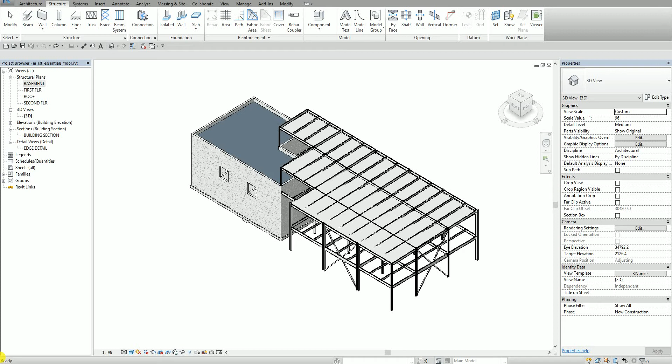In this lesson, I'm going to continue my discussion about Revit Structure 2017. I'll teach you how to add and modify floor elements, add the floor, show you how to add the shaft opening, and modify the slope of the existing roof deck. As you can see on this level, there's no floor here, and I'll show you how to modify your existing roof deck by changing its slope.

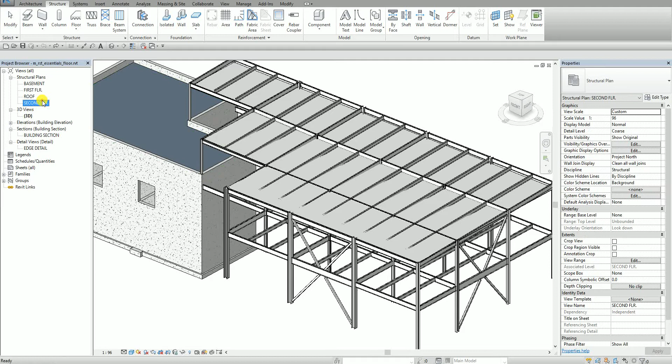Okay, let's get started. First, I'm going to open my second floor, where I'm going to place my structural floor. From the structure tab, I'm going to select the floor.

I'll just use the default floor here, and then I'm going to use the line tool to create the boundary of my floor.

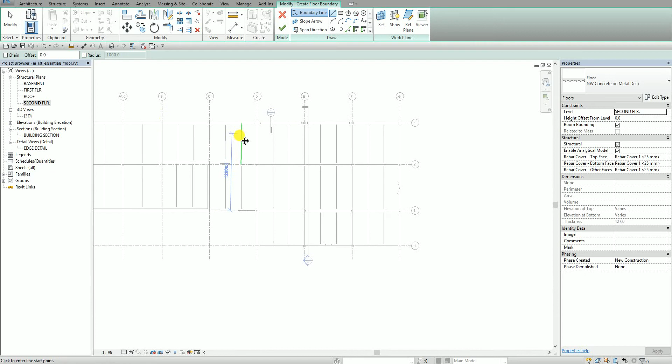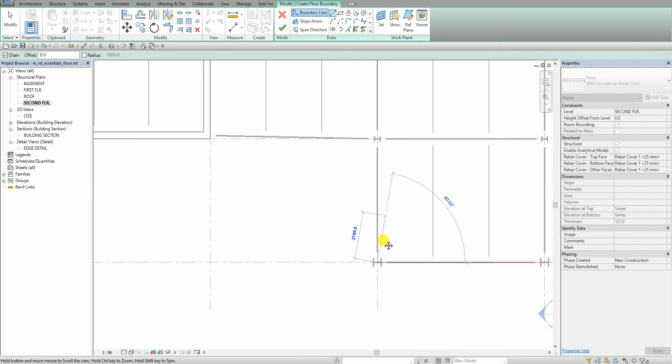I'm going to click this grid intersection here, my B1. So I click here, G1, so let me check the chain here so I can create the boundary continuously. G1, then G4, D4, D3, and C3. After that, I'm going to select modify to terminate the creation of the boundary.

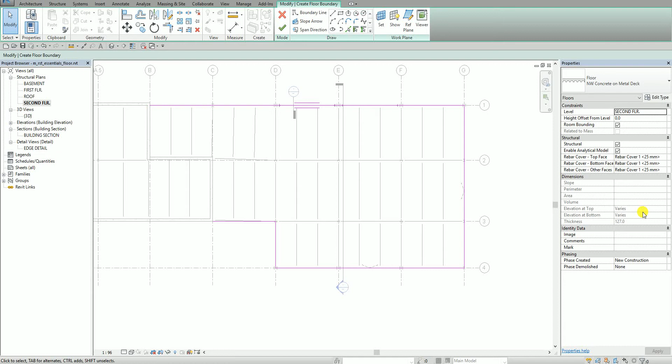What I'm going to do next is add an offset here. I'm going to select these 5 sketches that I have created by control select. Just to show you on the options bar, there's an option called cantilever concrete, where you can add a distance, an offset distance. Let's say I key in minus 150, and then enter. Okay, and then I select modify.

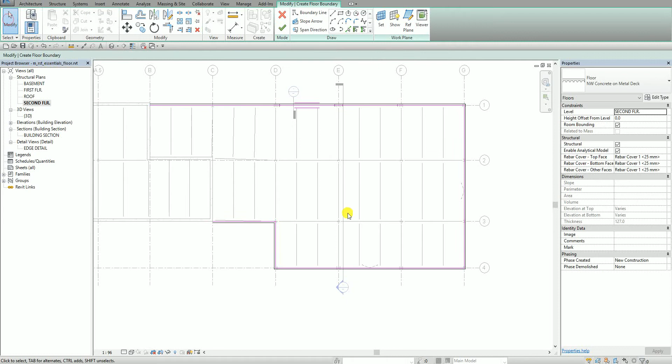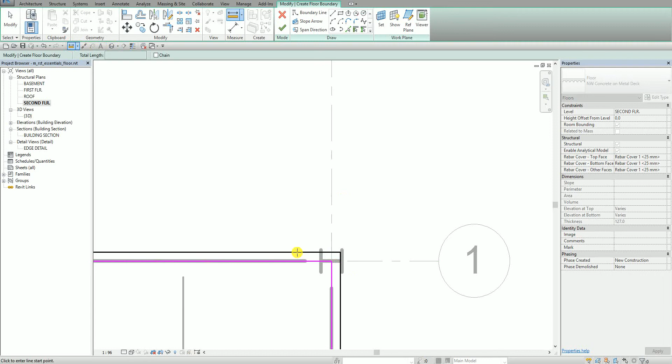In this view, I'm going to zoom in just to show you. Notice the magenta sketch line is along grid line 1, and there's a black line here that represents the edge of the concrete. So this is your 150. So later on, I'm going to show you how you can use that option.

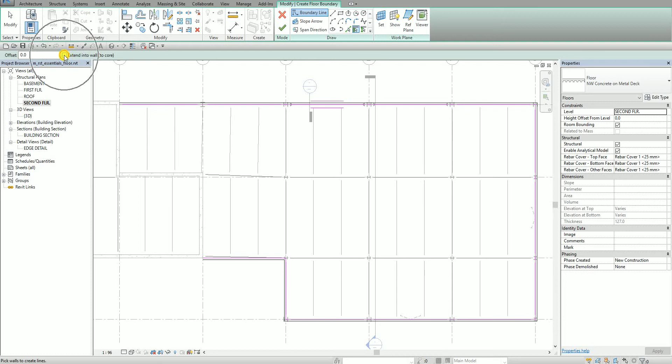After that, as a rule in creating your sketch, you've got to make it close. So for this time, I'm going to select the pick walls tool. I'm not going to extend this to the wall core, so I'll uncheck this. Then I'm going to pick the interior face of this wall, and then this wall, and then this wall here. That's the rule in creating the floor sketch, so make sure it's close.

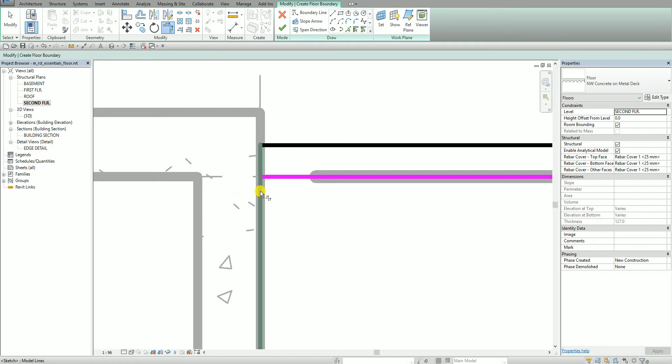Just to make sure, I'm going to trim this side here, and let me check the corners, this corner also. There you go. Every time you create the boundary of your floor, make sure the boundary is closed, with no intersection and no overlapping.

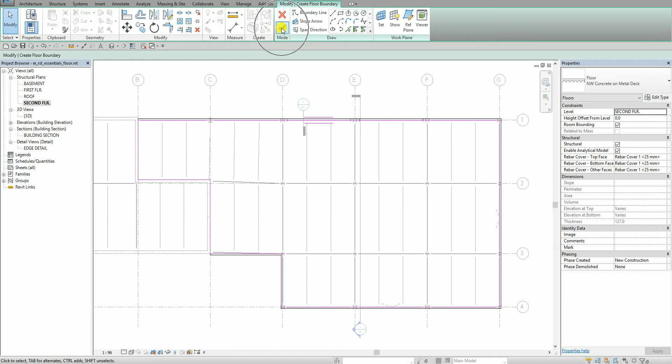After that, I'm now going to select check here to finish the creation of my floor. So I click this, and I'll close this one. No need to add the symbol. It asks, would you like the walls go up to this floor's level to attach to its bottom? I'll select no. There you go, so there's now my floor.

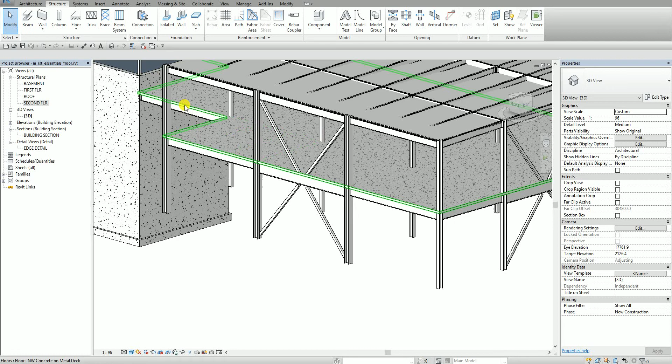If I check here the 3D view, it looks like this - this is the floor that I just created. If I open my detail view, let's say the edge detail, this is the floor that I created. If I measure this from here to here, that is actually the 150.

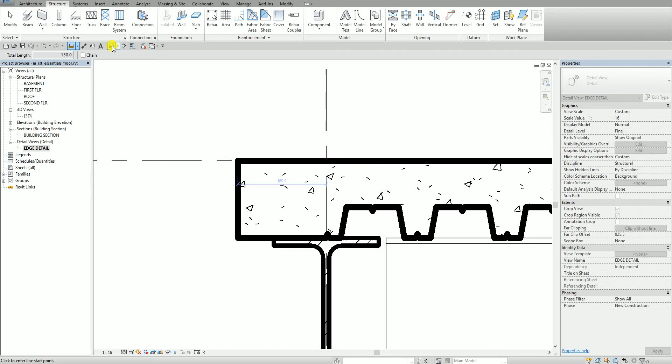Now after I show you how to create your structural floor, the next thing I'm going to do is add a shaft opening. Let me go ahead and open the second floor here, and zoom in. Let's say here I want to create an opening here. To do that, from the structure tab, there's an opening panel, and I'm going to use shaft opening.

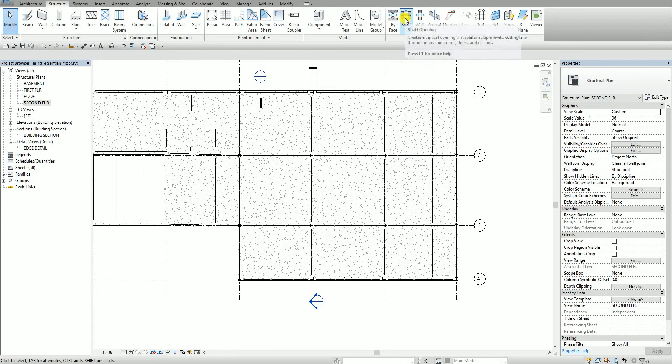This creates a vertical opening that spans multiple levels, cutting through intervening roofs, floors, and ceilings. You can also use this to create an opening on your ceiling and roof, aside from the floor. It's like the floor creation also, wherein you need to create the boundary, making sure it's closed, with no intersection and no overlapping. So let's get started. I'm going to select the shaft opening here, and add an offset distance. I'll just select the pick lines tool.

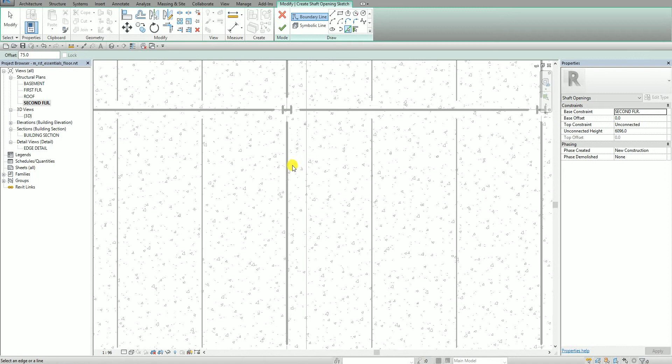Okay, and then I add here an offset distance. Let's say I want an offset distance of 75. Okay, and then I'm now going to pick here. So there's the offset distance of 75. Here, here, and this one.

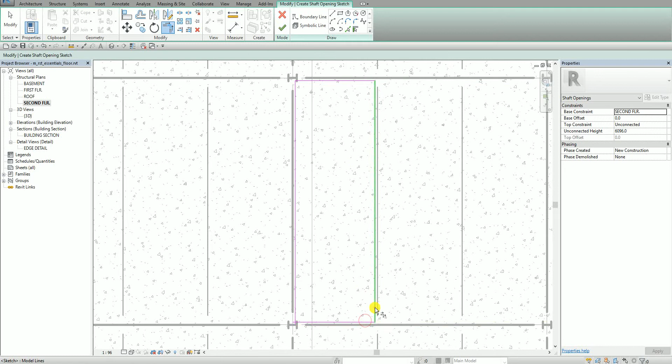Alright, and then I'm going to use again the trim extend to corner, making sure that there's no intersection, it should be close, no overlapping. Okay, so this is now the boundary of my shaft opening. Aside from that, what I'm going to do next is add a symbolic line, just to indicate that this is an opening.

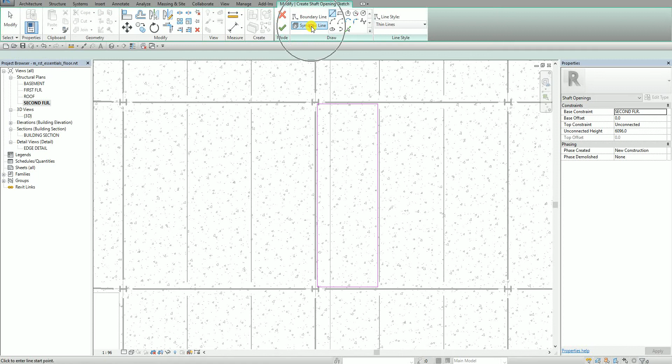Alright, so I'm going to select the symbolic line here. I'll just create a cross mark here. There you go. And then modify. And then I can also change here the top constraint of my opening.

So at the moment, my opening will start at my second floor level, and then it will end here unconnected. Top constraint - so I'm going to change this to roof. So my opening will be from second floor until the roof level.

And then I can also add here an offset distance. Let's say I add my top offset here, 900. So from the roof level, the opening will move up for another 900 mm. And then after that, I select here check to finish my opening.

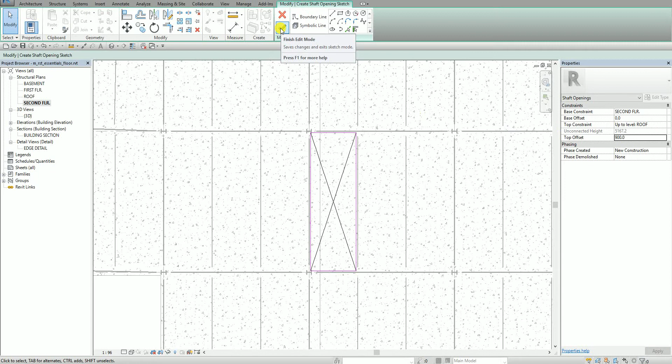There you go. And then I select modify. So as you can see, there's the symbol along with the opening. Okay, so in case I want to modify the opening, I'll just select the opening here, and then I can...

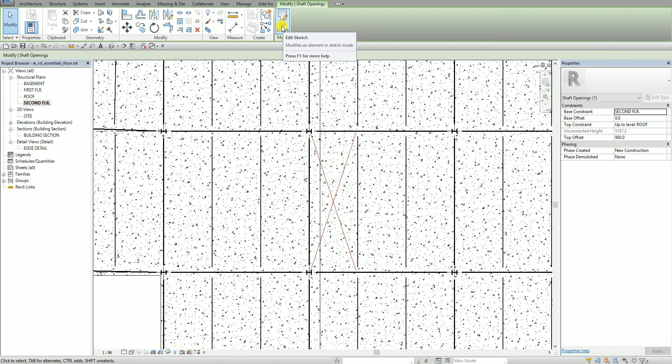Select here edit sketch, so no problem - you can still modify the opening of your shaft. Anyway, I'm not going to change it.

Now I'm gonna select the 3D here just to show you the opening. So there's the opening - shaft opening, it's a separate entity wherein you can select it separately. You see, I can select the shaft opening. And then from the roof level, it moves up for another 900.

Actually, you can also use the shape handle here if you want to move your opening, right? Or you can just key in here manually, like for example 900. There you go. And then after that, I'm going to select here modify.

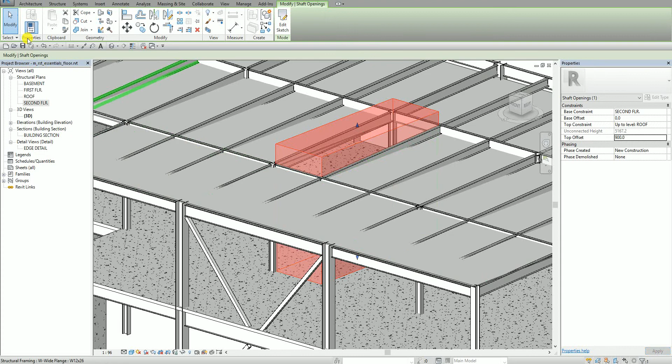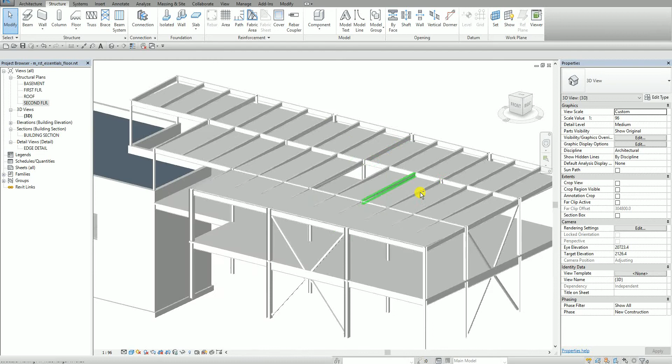So that's my opening. Now I want you to notice also that aside from the shaft extending through the roof, notice that the roof here is horizontal and does not slope with the framing. As you can see, my roof here is not following the slope of my framing.

So what I'm going to do is modify the slope of the roof deck. To do that, I'm going to open here my roof level. So this is my roof level.

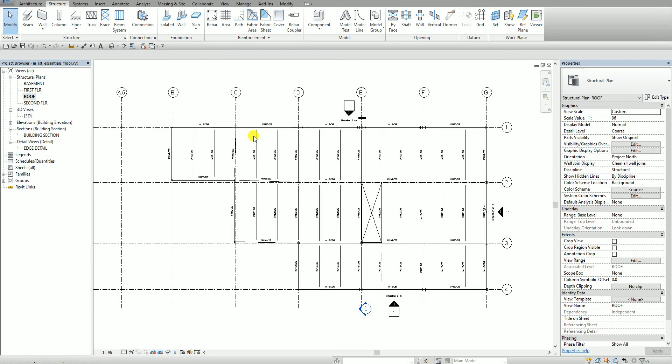And then I'm going to select now the roof here. So I can move my pointer along this line here, and then I'm going to press the tab continuously until it highlights the roof deck, just like that. Remember, every time you press your tab, it cycles the selection, right?

So I'll just continuously press tab until it selects or highlights my roof deck, just like this one. So once you see that my roof deck is now highlighted, I'm going to select it. And then from the Modify Floors contextual tab, there is a panel here, Shape Editing.

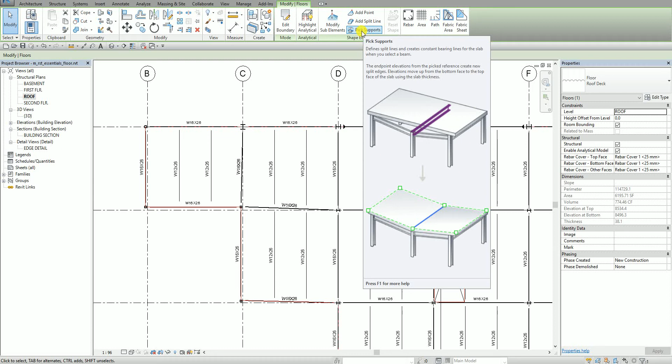So I'm going to select here Pick Supports. According to the definition, it defines split lines and creates constant bearing lines for the slab when you select a beam. So I'm going to select a beam here - select the Pick Supports.

So I'll start selecting the beams along my grid 2. I pick this. Alright, I pick this. I pick this one, and then I'm going to pick this one. Alright, okay. Notice that the slope lines are updated as I pick or select each beam.

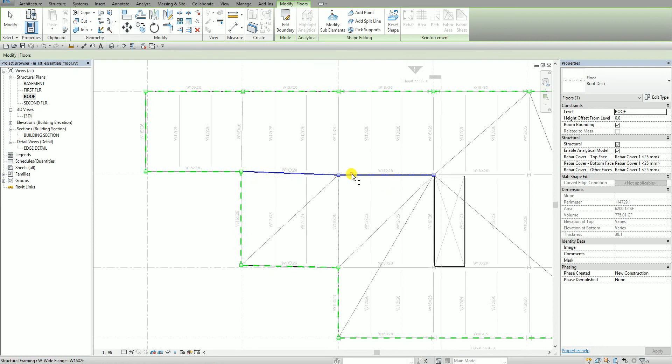So I'll continue again here on my beam here, this beam here, this beam, okay, this beam, beam. Then along grid 3, click the beam, beam here, beam. It's a very beautiful, very nice tool, Pick Supports. Pick here, and last one.

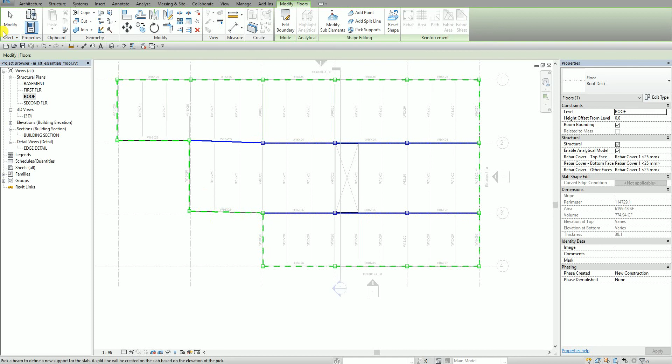There you go. And then after that, I select here Modify to deselect or terminate the Pick Supports tool. So if I'm going to change now my view to 3D, voila! So there's now my roof deck. It now follows the slope of my frame.

So there you go, that's the exercise. In this exercise, I have shown you how to create your floor, structural floor. And then we also created the shaft opening, and I have shown you how to modify the slope of the roof deck.